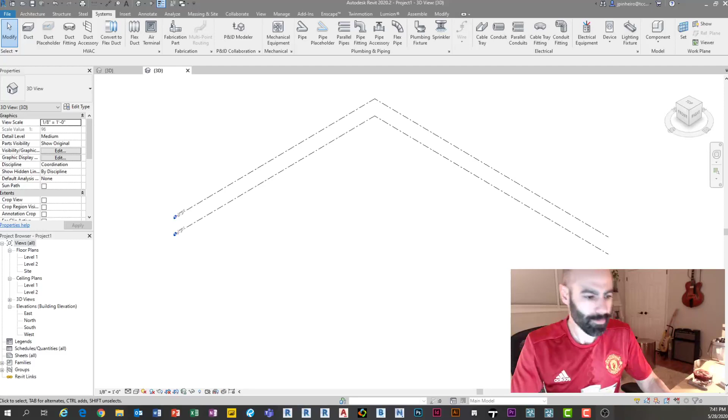What's up, Derek from Connecticut? Actually, you know what? Good point, Derek. So Derek from Connecticut is the one who made the thumbnail, so thanks, Derek. But I did want to show it live because I didn't want to use that specific thumbnail. I was afraid YouTube was going to rip it down, because you'll see why. So this was the original thumbnail for this Ductwork for Dummies. I thought that was pretty cool. But unfortunately, I was afraid that the stream would get popped down or something funky. So, all right, here we are.

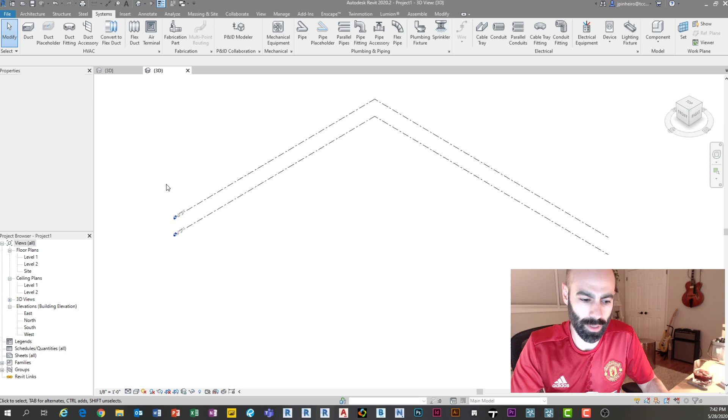So remember, I'm an architect. So I'm like, hey, I'm in Revit. I want to draw a duct. I'll even start it from scratch just so that you believe me. So if I start a brand new file, I go to File, New, Project, and I do an architectural template. So this is the Autodesk architectural template file, okay?

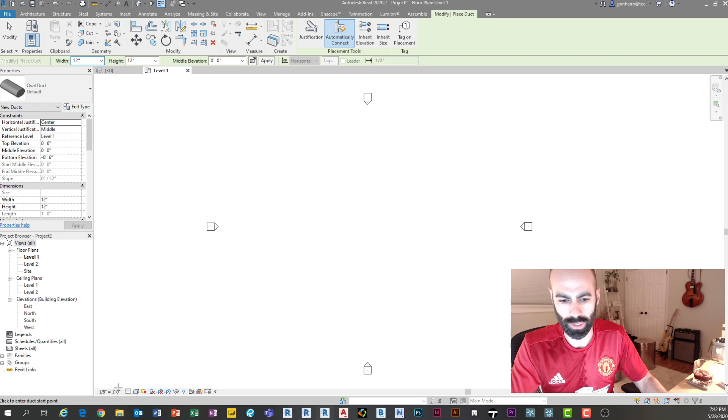If I go in here and I hit Systems and I say, hey everybody, I'm going to draw myself a duct. So I'm going to hit Duct, Oval Duct, right? I'm going to change the offset because right now it's actually drawing 9 feet above my head. I'm going to set it to 0 just for the sake of this. I'm going to change my view to fine so I can see it. So there we go, I'm drawing a duct, right? All right, now it's going to turn the corner.

Wait a minute. What? Why is it telling me no? Look, I can't click a duct except for straight. I don't understand. What on earth is going on here, right? And so this is literally what I did when I first hit it. And pipe, same thing. All right, I'm going to draw a pipe now. So let me click a pipe. Let me click 0. Click here. What the heck?

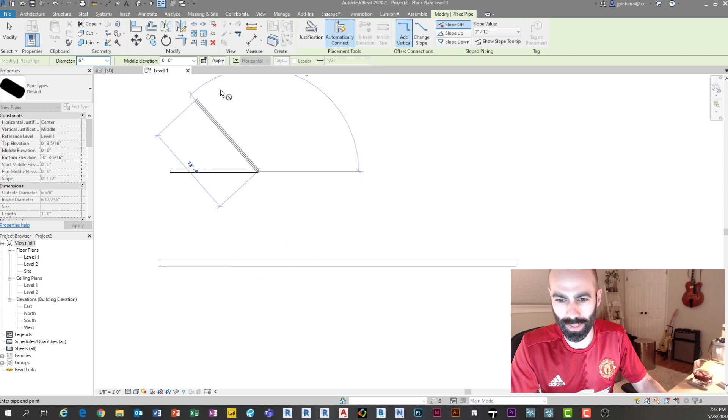Why on earth can't I draw a pipe in different directions? This doesn't make any sense. So then I'm like, all right, well, let me try. If I draw one over here and I trim it. Oh, what? Like it says there: the routing solution failed because there is no default fitting type specified, or the fitting cannot be found in the project. Ensure the fitting is loaded in the project and try again.

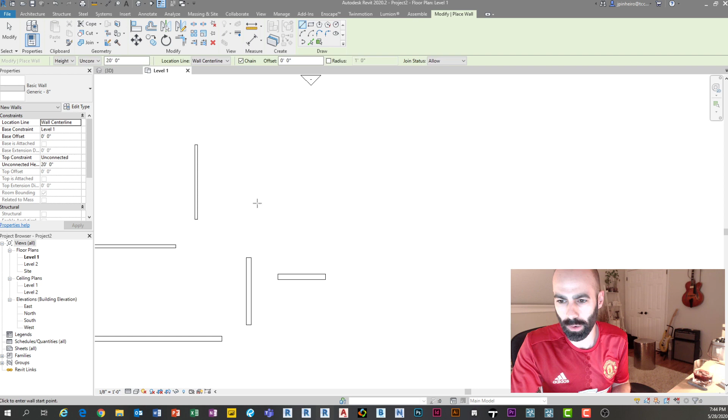Everyone has been here before, because that's exactly where you start, that's what happens, right? And so you're like, I don't understand. I can go into architecture, I can click wall, and I can do whatever I want with this thing. Look how beautifully that cleans up, right? Why don't pipes work this way? Why don't ducts work this way?

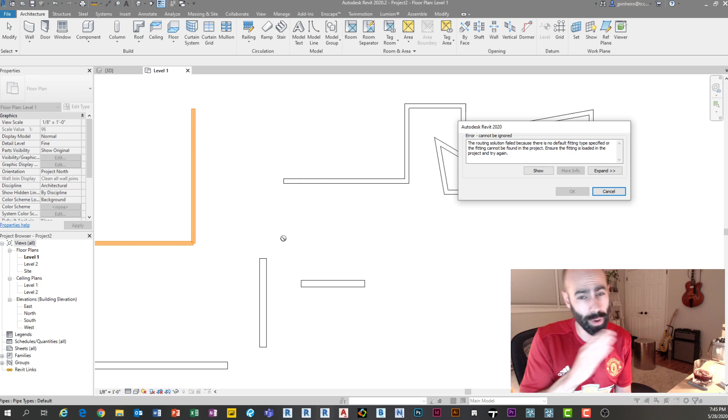And so the key to understanding, and this is really the most important concept when it comes to using pipes and ducts in Revit, is reading this error. When you read this error, it says the routing solution failed because there is no default fitting type specified or the fitting cannot be found in the project. So the difference between a wall and a duct or a pipe is that in order to connect two pieces of pipe, something needs to be there, right?

If I asked you to go install, I guess black iron pipe's not as common now, so maybe copper or PVC, but same idea. You have to go run a new supply line to a new sink in your house, right? Yeah, you could buy some bends and stuff like that, but odds are you're gonna buy a bunch of straight pieces of pipe, and then you're gonna buy tees and elbows and 45s and everything, right? Because that's just how these things work. Well, Revit's the same way.

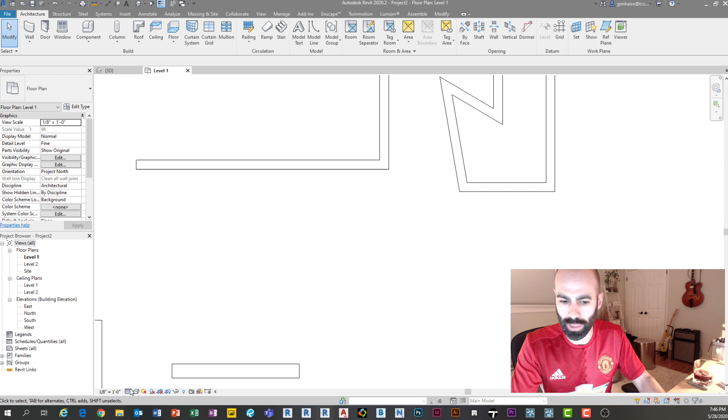You cannot draw these things without having your tees, your elbows, your Siamese, whatever fittings that will make these things connect, right? Walls don't need that, because walls, yes, there are layers to them, and really the biggest thing we're controlling with a wall is going to be how those layers return, how they loop and react with each other, which is their own thing. But you don't necessarily need a fitting to make a 90-degree wall, right? It's not necessary.

So all that being said, this is the architecture template, right? So then if I go into a file like this, and I go into my floor plan, and I go to 0, why is it that I can do that with my duct? I just made ductwork. It's all because of those routing preferences. It's all because of those fittings and those connections, okay? So where do you find these and how do you set them up?

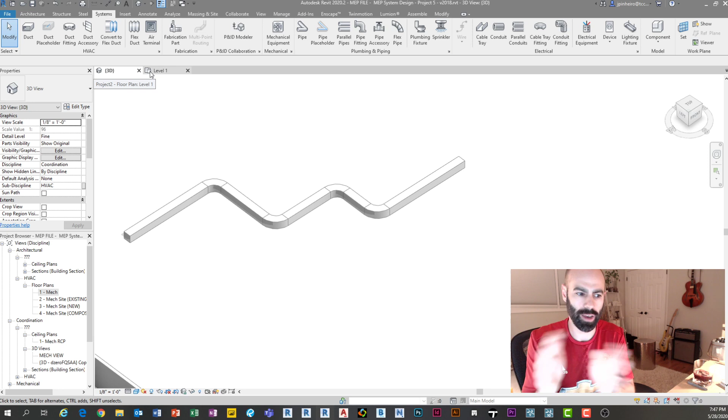So I'm going to go back to the architecture file. I'm going to be flipping back and forth. Eventually I'm going to land just in this file, but I'm going to flip back and forth a little bit because I really want to show you what it takes to develop and create this template file, and how to modify one if you need to. The cool thing about it is once you have a file set up with specific duct systems and pipe systems and the routing preferences that work for you, which for the most part you can get almost all of them set up and not have to do too much after the fact, then you're pretty much set.

You don't even really have to think about routing preferences anymore until you try to do something really, really wonky.

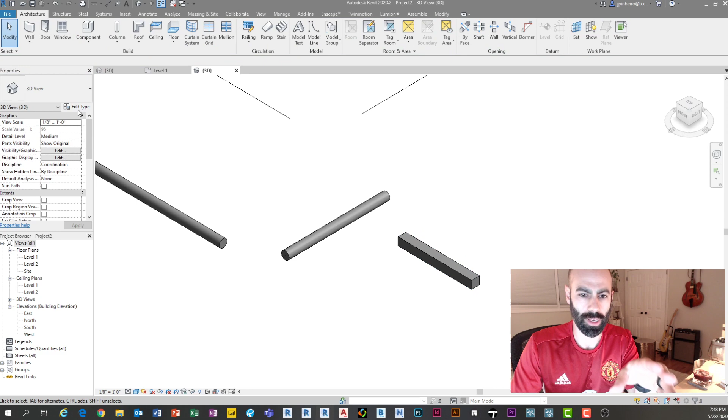For now, what I want to show you is if I go back into my architectural file and go into 3D, because why not? If I click this rectangular duct, by default there are ducts in here, right? There's an oval, rectangular, and a round duct. If I go to edit type on this duct, right down here, there's a little thing called routing preferences.

If I click this right here, you can think of this as important, if not more important, than your structure of your wall when you're digging deep into dialogues.

If I click in this, what you'll notice is that there's all these different types of connections. Look, there's an elbow, junction, cross junction, transition. But what you'll notice is that they all say no, or none, right? So basically, Revit has no idea when there's a cross or a transition or even an elbow. It doesn't know what to do, right?

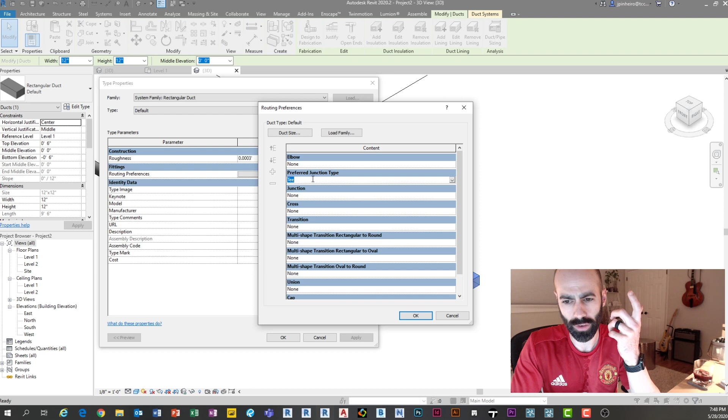The only thing, for some reason, that the architecture file has is a T, which I don't even think it had. I'm actually, since we're live, why not? I'm going to try to model a T in here and see what happens. Yeah, I don't know why it's telling me that there should be a T, but that's kind of weird.

Okay, so you'll notice these all say none, okay?

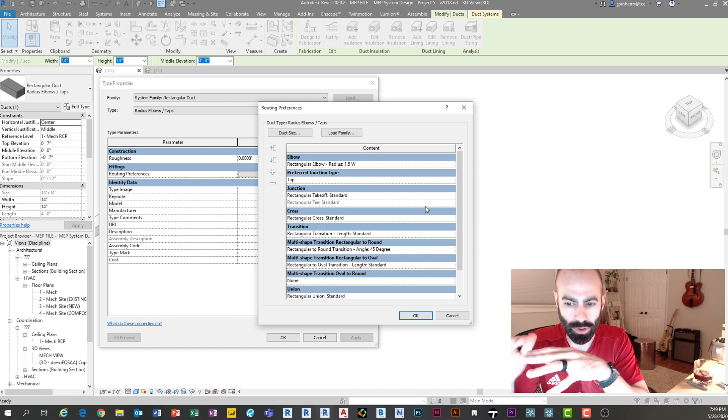If I go into my template file over here that has the routing preferences set up, and I click my rectangular duct, go to edit type, and go to routing preferences, look at that. There's a rectangular elbow, there's a tap, there's a rectangular takeoff for junctions, there's a cross, there are families applied to every type of connection or junction you can think of for this specific duct type. And so that's the important part.

So if you did not have a template, and maybe you're working in your architecture file, I'll show you a way to do that anyways. But let's just say for some reason you were starting from scratch, which after tonight you will not have to start from scratch. But right now, let's say you're starting from scratch because it's always good to know. And I'm in the architecture file.

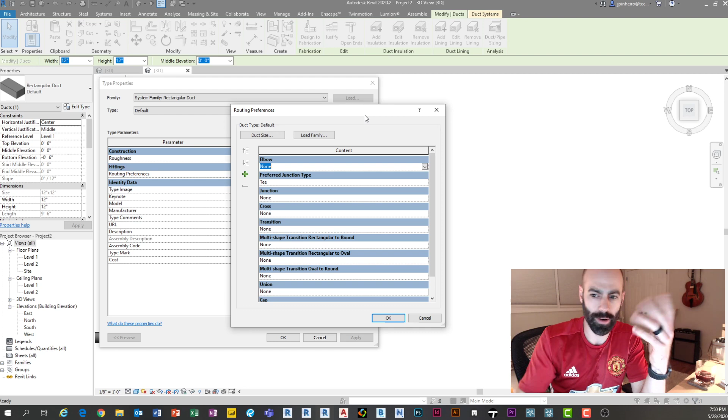If I click the rectangular duct here, go to edit type, and go to routing preferences, you'll notice that even in here, I can't even pick a family because every one of these junctions, the elbows, the T's, the 45s, the Siamese, whatever, right? Every one of those is a family, just like anything in Revit. So you need an elbow family. You need a T family, a radius, a mitered elbow, right? And so you actually need to go dig through your family catalog and load all of these fittings.

So imagine what the process is to initially set these things up, right? I'd have to go through every single one of these types, load the family, and apply it. Yeah, I could load the family, I could batch load the families and then apply it, but you're still doing it for every single type.

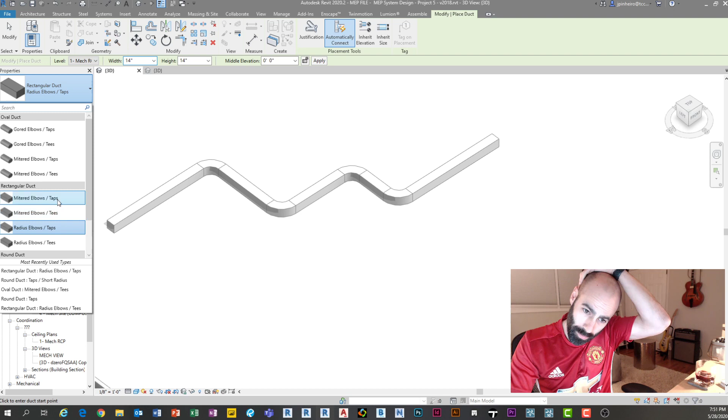And if you want to have radius, let's say, if I go on this one, for example, oops, I did multiple types, didn't I? If I wanted to have mitered elbows and radius elbows, which is what you're seeing here, right? See how there's two different types here? I have to do that for the two different types. So notice I go in here, and this elbow has its own setting, right? It's a mitered one, whereas this type has a radius. So not only do you have to do it for every single one, but you have to make sure the specific connection or junction is set for each family type.

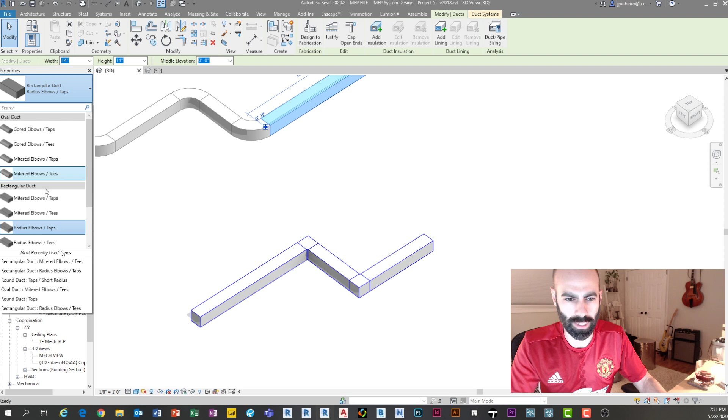So if you have multiple types of connections on rectangular ducts, you need multiple types of connections set up for rectangular ducts, right? See how these have 4, and these have 4, and then these have 4, right? These are kind of the most common that we use to create our MEP systems.

So if you were to do this from scratch, that's what you would have to do. You would have to march through and set up each one of those, which would hurt, as you can imagine. The good news is, you don't necessarily have to do that part of it.

You can start with a file that already has it, or you can use a file that someone else made. One way I've done it in the past is that if you've installed Revit, you have a mechanical sample file that Autodesk created, and that has a lot of them done. It's not perfect, it's not great.

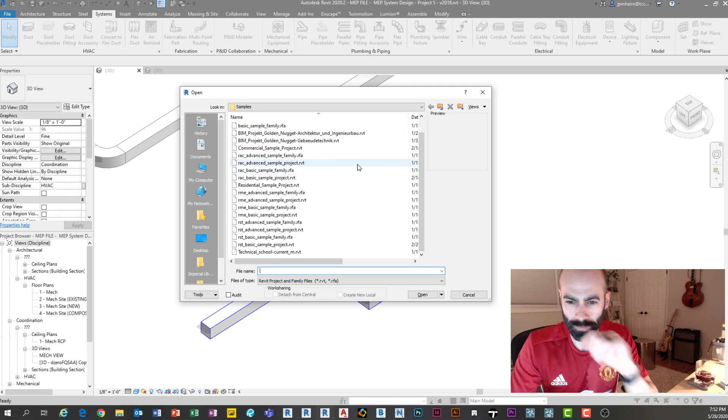But if I go over to File, Open Sample Files, and go to the RME Advanced Sample Projects, Revit Mechanical Engineering I guess, which you all have the ability to do, you'll notice that in this file, if I go to Edit Type or pull down here, you can see they have a lot of these things already set up, like routing preferences.

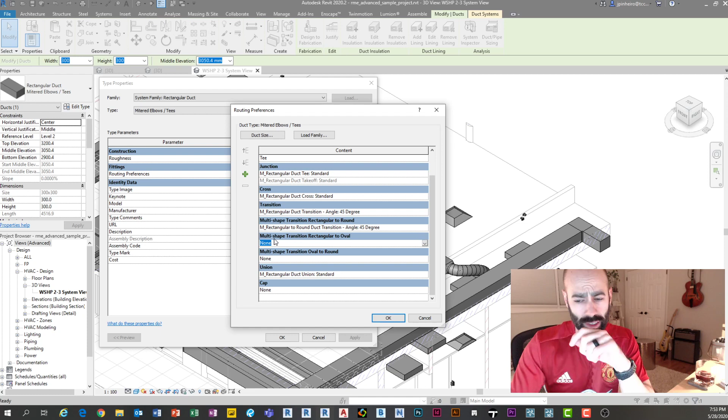But you'll notice there are some specific connections that they do not have families loaded in for. So you will find instances in this template where you may run into that same error, and you have to figure out what family belongs to the transition you're trying to make. So what you can do is start with this file.

You can start with a blank file and transfer project standards, which I'll show you real quickly how to do. What's funny is I'm going through all this, and it's 10 minutes down the road, and we haven't even really drawn a duct. I haven't shown you the process of drawing a duct.

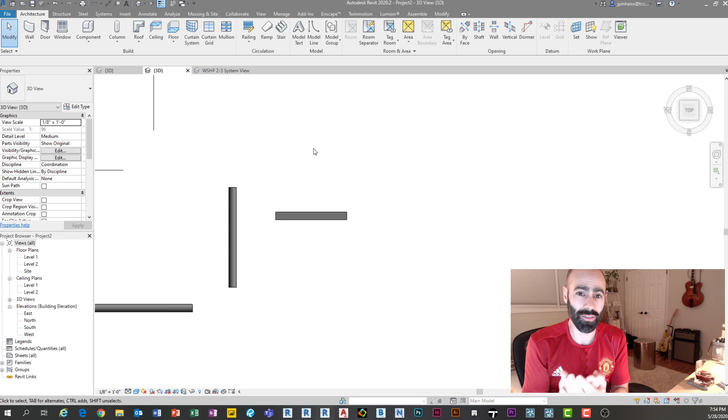Because this is one of the most important pieces of using the Systems tab. This is the most important piece of using ducts and pipes, is having the right junctions in the template, in the file that you're using. From there, once you set this stuff up, you'll see exactly how easy it really is to model pipes and ducts. It's super easy, but as long as these things are there.

So what I could do is go into Manage, Transfer Project Standards. Now I'm in my architecture file, and I can dig through and look for pipe types, system types, all these different things, and go down the list and so on. So if you want to, you can do that.

Or I do believe that if you copy and paste a full system in, it brings in, I think it brings in the type. I don't know, you guys can probably verify that for me, but I believe if you bring in an entire system that has what you're looking for, I believe it has it.

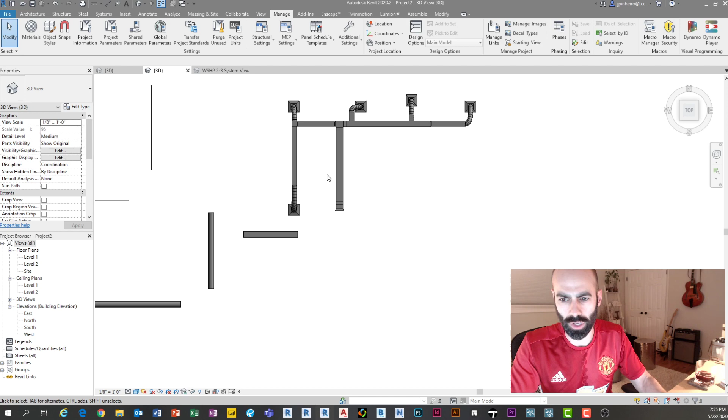Yeah, you can see there, notice this was a different type. See, mitered elbows, the default was what was there, and so it does bring them in. So that's one way to do it too.

If you guys want to use the file that I'm going to use right here, this file is one that actually Derek, who's in the chat right now, him and I sort of created by combining a whole bunch of things and projects that we've created. And then I use this specific file for homework for my students.

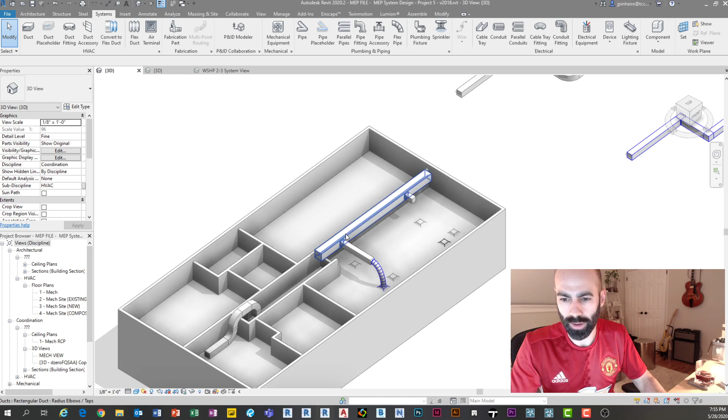So to wrap up that whole beginning section, I'm going to try to get to some of the chats I see there, so I want to make sure I read some questions before I move on.

Understanding that you need to have routing preferences set up - think about pipes and ducts, and think about how you'd build them in the real world. You cannot put two pieces of straight duct right together without a T, or two pieces of straight pipe together without a T. There's a connection that exists. That connection is a family, and Revit needs to know what it's doing. So there's not only a T, but imagine there's a 45 degree T as well.

You know, so you can see how this sort of grows and grows and grows.

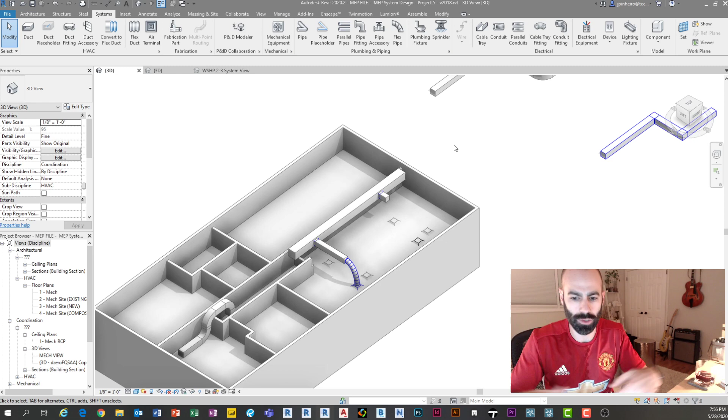So key here, setting up routing preferences is major. It is the most, if not the most, important piece of it.

Let me just read some of the chat, since I see folks are asking questions here. Sorry, Hussam, to ruin it with my Man United shirt, if you missed the intro. But I'm celebrating the Premier League coming back in a couple weeks with my favorite team, so I apologize if that offends anyone.

Everyone gets the error. Awesome. I knew you guys would. Oh, Derek's correcting me on how to make that T work. You're right, I can specify the junction type. Sorry.

My easiest method is, and Scoured actually just said, the transfer project standard process, which is great. So that's one way to do it. If you want to copy paste, you can copy paste, whatever, or start with the template.

Right, awesome. So Ryan asked any tips on ducts from laser scans.

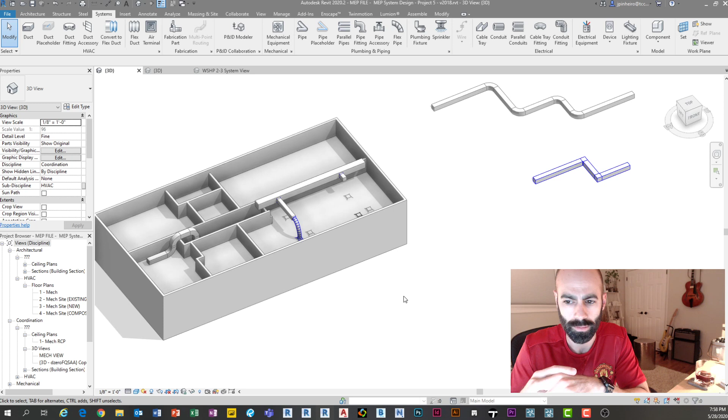Let's draw ducts first, and then we can get there. But I can tell you right now, I don't think there's any trade secrets yet for this, other than brute force modeling for that part of it. But either way, let us do this.

So now we have a file, and our file has what we need, right? It has ducts, it has pipes, and ideally we can draw pretty much whatever we want.

Once you have that, modeling the ducts themselves actually becomes extremely simple. It's very much like drawing walls, right?

So what I'm going to do, this is what I teach in my class. This is actually the homework assignment I give to my students. But really it's just some reflected ceiling plan with some ducts on it, just to get them to reinforce what they learn.

But the actual ability to draw, I'm doing it in a reflected ceiling plan because I feel like that's the easiest for me to model in. It makes sense to me.

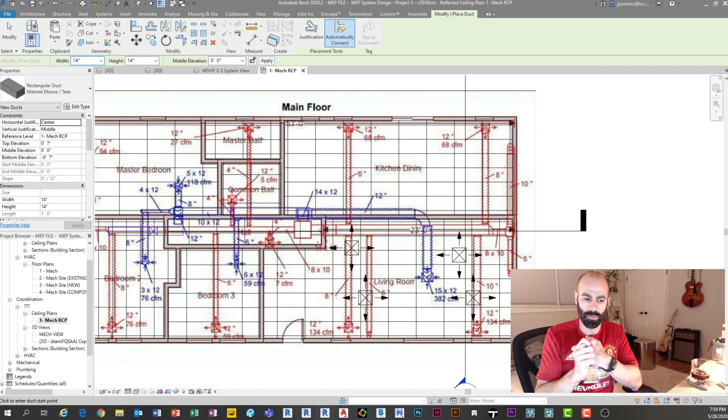The first piece of modeling ducts and pipes is the routing preferences and making sure those are set up, right? Starting with a good template or bringing in good template information. But really it's bringing in those duct and pipe types that have the routing stuff ready to roll, okay?

The second really important piece is not being afraid to use views. So when you're modeling pipes and ducts, you are going to be flipping between floor plans, sections, elevations, reflected ceiling plans, and 3D views. You're going to be using the whole gamut because it's the easiest way to do it, right?

And I just saw a question here that said tips for vertical pipes and ducts. We're going to get right into that in a second, but the views are really important because just like anything else in Revit, the ducts and pipes rely on work planes. Everything in Revit pretty much relies on work planes, right? And so it becomes important what view you use to actually draw your ducts and pipes, okay?

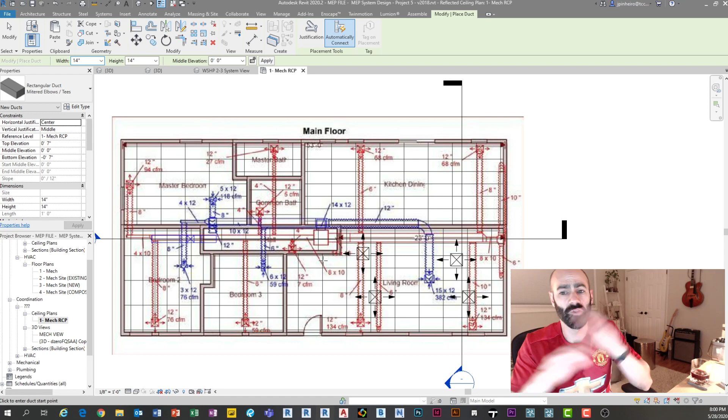So right now, really simple. I'm on a reflected ceiling plan, and I'm just going to draw some ducts. So you can see my reference level is level 1.

But you'll notice it's level 1 mechanical RCP. So that's this level. It's a little confusing because of what it's named. I didn't want you to think there's a level up here. But so this is actually my reference level. But you'll notice, and don't be afraid of this because it screws everyone up.

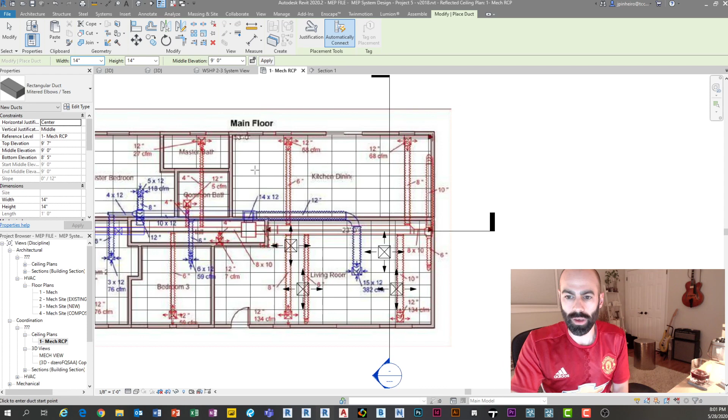When you hit ducts, it's kind of like when you're drawing foundation walls. Every time someone new draws a foundation wall, they're like, why the hell can't I see it? Because Revit defaults the base of the wall to be like -10, right? And so by default, the elevation of your ductwork is usually set to like 9 or 10 feet. So if I'm in a floor plan and I go to draw a duct, immediately I'm going to get this error.

Oops, there it is. Let me pull it up there. Right, none of the created elements are visible in view. So I can't even tell you how many times I get this question. Where is my stuff? Right? If you go in 3D, you'll see it's there. But what's happening here is that you're in a floor plan view, cutting at 3 feet, and you're drawing your duct at 9 feet above your head. Right? And so that's where it's important to have your view set up and to understand what's going on here.

So by going in my mechanical RCP, you'll notice there it is, because now remember I'm cutting at 3 or 7 feet and I'm looking up, whatever my RCP is set to. So by default, pay attention to this options bar. The options bar in the middle here, which no one ever, especially when you're new at Revit, remembers is here. Somehow it's green right now, but I can't tell you how many people miss this bar right here. Don't miss this bar. Whenever you're stuck on Revit, start here. Look at this bar, okay?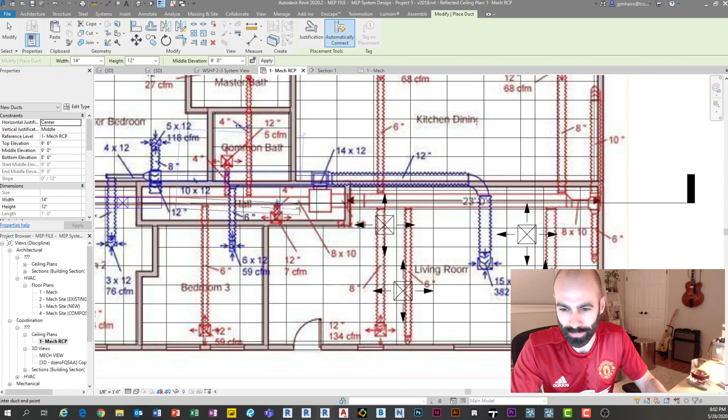So let's say I want to draw these at 9 feet. So it's pretty simple, right? There's a size, and you can see all the sizes are here. And this is the height and the width. I'm not even going to bother trying to zoom in and read that right now. But let's just say that I'm going to do a 14 by 12 inch duct here. Oh, it's 10 by 12. Of course it is. Okay, so I'm going to draw it to here. And now I can just keep drawing as if it's a wall, right? I can draw left, right, up, down, whatever.

I know it's hard to see. Sorry. I should probably just... Ooh, man, sorry, my throat. Is anyone else's allergies getting to them these days?

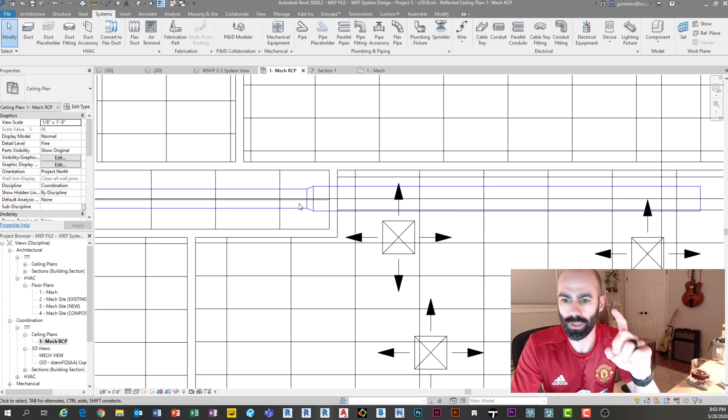Okay, let me just hide this plane because it's just annoying now. So now I can draw ducts just like walls, right? I'm drawing at 9 feet and so on. But what I can do also is, let's say the width now changes to 18 inches and the height changes to 14 inches. If I continue drawing, you'll notice it automatically enlarges and there's a fitting there. And that's part of the routing preferences, right? If I go back into my architecture file and do this, it's going to yell at me because this fitting, which is a 45-degree transition, that family doesn't exist. But because the routing preferences are set up, I can just go willy-nilly.

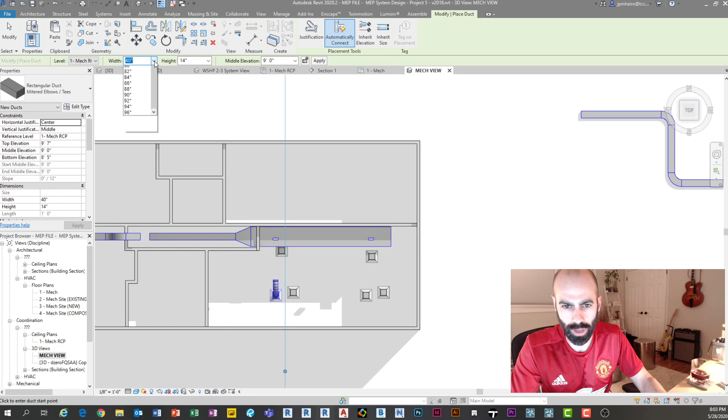I just change this to a 40-inch duct. I'm going to do some stuff in 3D now because I think it'll be easier for you guys to see. Let me go to the mechanical view. Here we go. Right, so you can see this fitting here, and it just adjusts. It's a parametric family. But what you notice is that as I was drawing my ducts, I don't really have to think about it anymore. Let's see, 9 feet, 40 inch. Let's draw now a 19-inch duct from here to here, and then maybe we'll turn the corner, right? Notice how that just drew. I just click, click, click. It's just like a chain of stuff.

Pretty freaking awesome, right? Oh look, I still have taps and all kinds of random stuff from before. Sorry about that. Delete all these. So the reason that you could not do that before is because of those routing preferences, right? Once you have these things set up, it makes your life so much easier.

If I want to draw pipes, same exact rules. So I go into pipes. I can set my diameter. I want to do 8-inch pipes. You can see my pipe is set to 10 feet off the floor. Notice I'm just working in 3D now. 3D is usually one of the easier areas to work in because you can flip between floor plan and elevation. But again, you're going to be all over the place with views when you're doing MEP for sure. So now I can just draw this pipe.

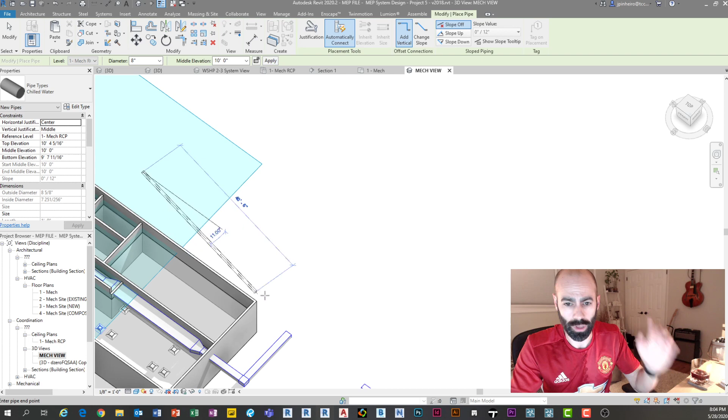Look at that. Notice it's even doing 45s. And then here's a funny thing. Notice how I can do this 90, but the second I go more than 90, I get a no. That's because there's not a fitting in there. The fitting type can't do that goofy justification there. So there's some things you have to do.

But for the most part, not to mention would you want to do a joint like that? I don't know. This is probably going to get you far enough. Okay, so notice how I can just draw pipes as if they're basically walls. Right? It's that easy. And then if you want to change the height of them, you want to change the size of them, it's very easy.

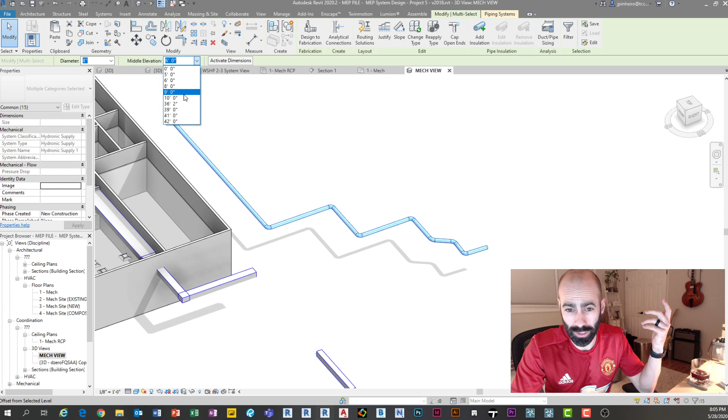If I just tab selected them, I can change the height to 8 feet, 9 feet. I can move them if I wanted to, but I like using this because now you're controlling it based off a level, which means that the level moves, your pipes move, parametric, Revit, you get it. If I select this middle one and I try and change it, this may blow some things up. Not too bad, look at that.

So I change this to a 10-inch, and because the transitions are set up, it automatically put in this adapter, right? This transition piece. I can change the entire system if I want to a different size. See how it just changed. So again, all of this is super simple because of the template I'm starting with. All right, and then notice the views make a difference. When do views make a difference?

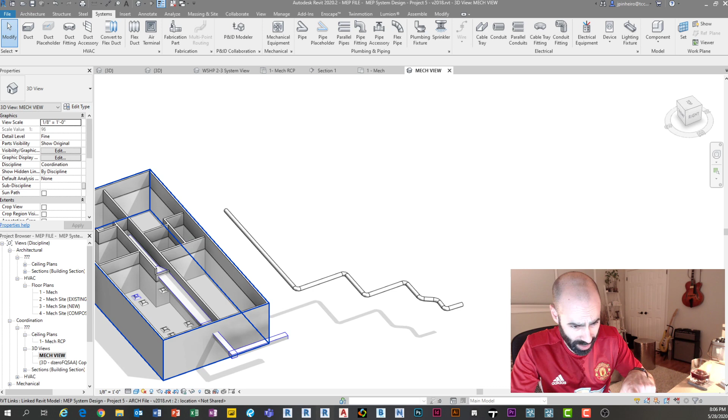Well, somebody asked about making vertical pipes and stuff like that. My favorite way to do vertical pipes, and there's multiple ways, but my absolute favorite way is to just do them in a section. So let's say I've got this duct here. The only problem with doing it in a section, and we'll talk about it in a second, is where the work plane is. But let's say I wanted to have, oops, wrong project.

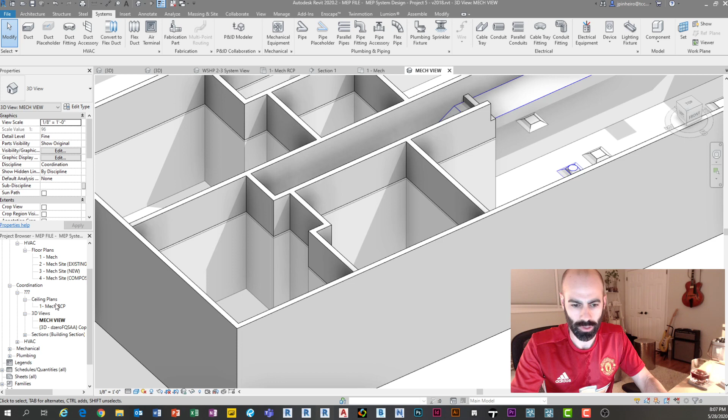Let's say I wanted to have pipes that went over this little wall here for some reason. Let me make this wall go, oh, this is a link now. I forgot. I did some weird stuff. So let's say I want the pipe to go over this wall, or there's something that I need to get out of the way in this wall, right? So one of the easiest and quickest ways to do vertical pipes is to just create a section and imagine that the center of my pipe is going to be this section. That's my work plane, okay?

So now if I go into this section, I go to pipes, you'll notice that it's still using mechanical room as my work plane. But I can't change the elevation. Why? Because I'm drawing in this goofy direction. So what I can do now is, look at this. I can draw now in a section as if I was drawing in a floor plan. See that? And now you'll notice if I select each one of these, the middle elevation is automatically set where I drew it. Pretty sweet, right?

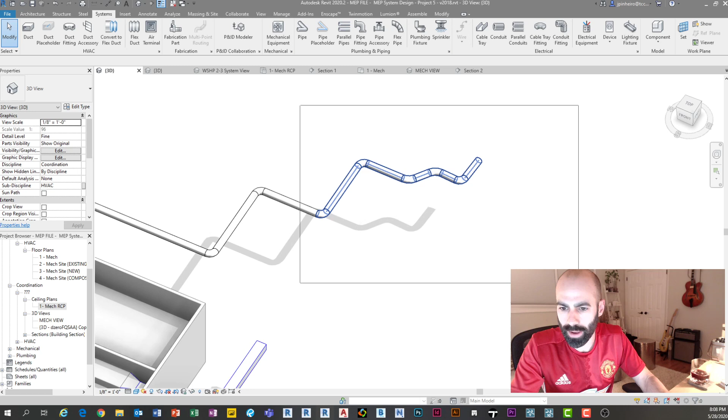So right off the bat, the easiest possible way to draw things vertically is to just cut a section and draw them in a section. There are other ways though. I don't know if I should do them in this or in another one. Let's see. So if I took this piece and I changed this to 15 feet. Oops, let's not do it that way. Let's disconnect it. So what I'm going to do is take half of this pipe here, get rid of this transition. I'm going to move this guy up, move this guy down to 10 feet.

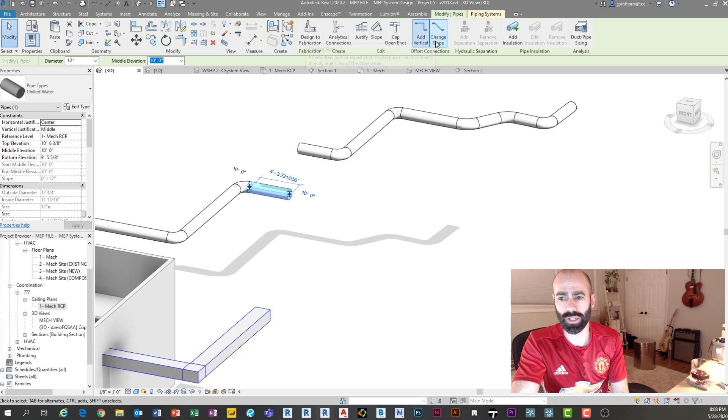Or 1,000 feet. What the hell did I just type there? 10 feet. Here we go. I don't know what just happened there. Okay. So see, there's connections here where you can say add vertical, add whatever. And so by doing that, depending on what your settings are. Sorry about that. I just got click happy there.

When you connect them, so see how I have these two runs here? If I was to take this piece, and this could have been done in elevation view as well, but I like doing it in 3D because it's really easy. See how it says add vertical? It's set to be adding vertical. So it's automatically going to try, and notice how it's locking to the middle. Revit's saying, all right, well, I'm going to do a vertical piece in between.

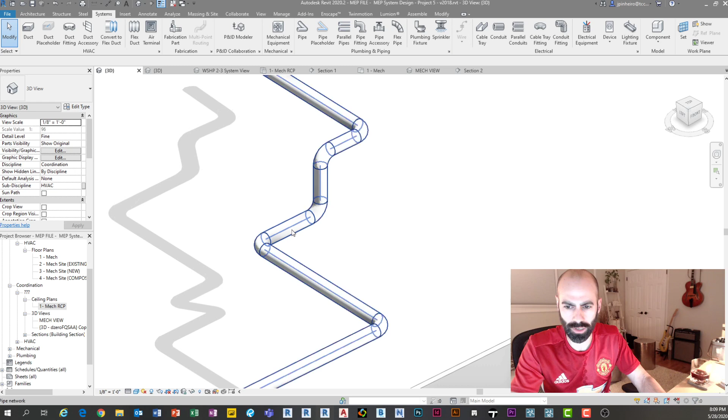Okay. So if you don't want to draw a section, because this would obviously have been hard to draw a section on, right? The easiest way to do it there is you jump into 3D and you just drag select and call it a day. So like, for example, this may not work perfectly, but let's give it a shot. Why not? If I tried going from here, no, that's not gonna work. There we go. Okay. I thought I was gonna try and do some angle.

So like, notice how these two ducts are at two different levels. If I go from the middle of this one, I'm locking, I'm connecting. All these things are set to automatically connect. And then it locks down to the bottom. If I click there, look what it does. It actually tries to make those connections. So when all of these things are set up, it becomes extremely easy to do.

And this is why it blows my mind. And again, I was in the same boat to think that this whole side of Revit, this whole systems thing is so hard and complicated. The reality is, once you have these things set up, once you have the template set up, once you have the routing conditions set up, it becomes extremely easy to do. Okay. So that's how you would model some stuff.

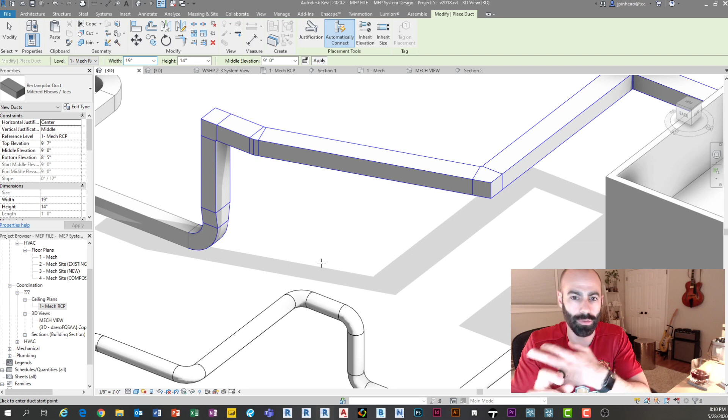You notice what I did there is I modeled in a RCP, I modeled in a section, and I modeled in a 3D view. So that's what I mean by views become really important, right? You're gonna need multiple views. You're gonna need working views probably if you're making documents out of these things. The views themselves are gonna be extremely important.

You'll also notice here, check out these joints. I mean, we've got 45s, miters, reductions, like all of those things there would have been errors in the other template. Every single one of those. All right, sweet.

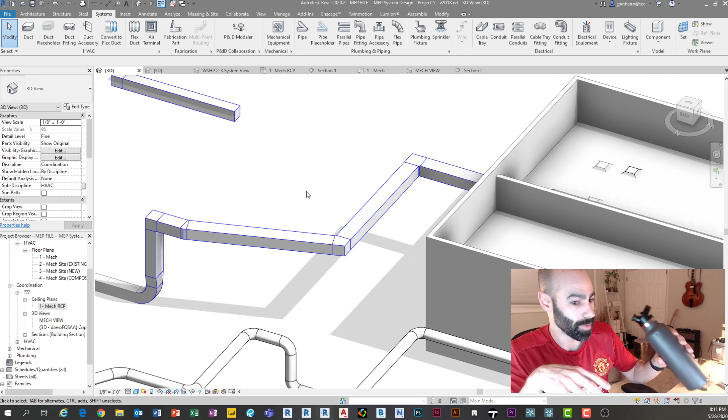Oh my goodness, it's 8:10 already? Get out of here. Okay, so let me just catch up with chat. Tango was upset that my ceiling grids weren't lined up. I'm sorry. That's just because of the image and the grids there. I apologize for offending you. I know I have the same kind of OCDs sometimes.

A couple people are talking about wall openings. We're not going to get into that today, but yes, it would be nice if there's automatic wall openings. There are. I believe there's a couple plugins that do it, and there are some Dynamo scripts that can get it done. So definitely look into those if that's something that is a major pain point.

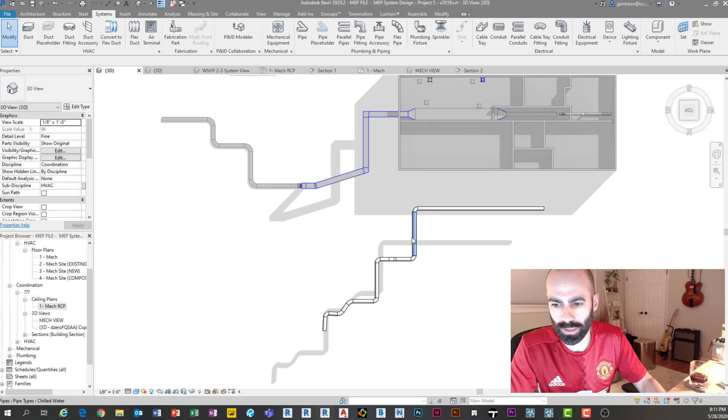Eduardo was one who asked about vertical pipes. I hope that answered your questions. I know that's one of the biggest concerns for people is you're drawing all these pipes, and you're like, how the hell do I make these things join vertically? And that's exactly how you do it there.

Let's see here. What else? Wondering if there's an easy way to do sleeves. Same question, so sleeves and openings are a challenge, right? And so, like I said, the way I've done it in the past is there are Dynamo scripts out there that do it. Yeah, I would say look at Dynamo scripts for now. One more question before I move on.

Talking about as-built. Yeah, Ryan's still talking about the laser scanning. And so, yeah, the biggest piece, for those of you who ever dealt with creating as-builts from laser scans, is that you can't just press a button and it converts a laser scan to pipes. Yeah, I know ReCap has this funky little tool that sort of does it, but the reality is you're gonna be modeling. There's grunt work involved in creating as-builts still.

Okay. Tips on pipes with slopes. Cool. Let's talk about it.

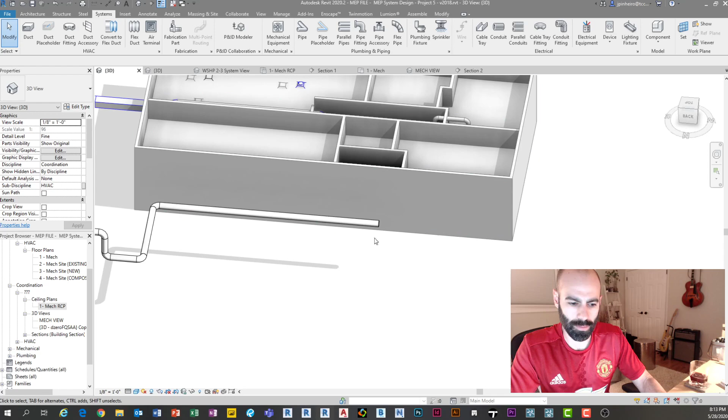So you'll notice each of these pipes has an elevation at each end. Right now I'm justifying it through the center, okay? And so if I know the elevation, so let's say this is 9 feet, ta-da, it's sloped. So I just changed the end elevation. But you'll also notice that there is a slope right here. See, it's saying 81 and something or other. So

if I wanted control over the slope itself, there's a little button. Sorry, I didn't mean to click. I was clicking too fast on you guys.

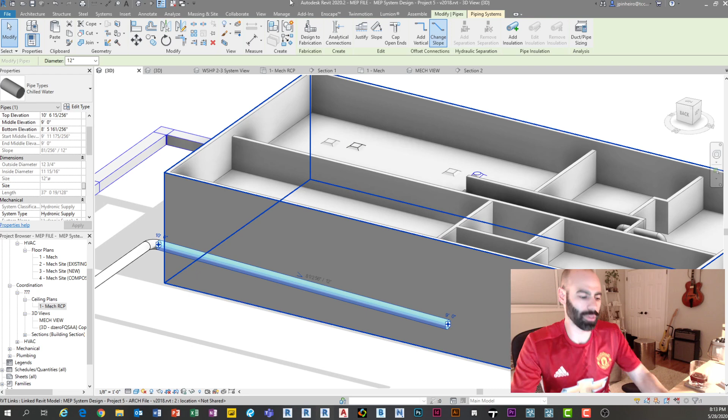So notice it's grayed out, and so that's what some people get a little confused about. So I just did 9 feet to 10 feet because I know that's what I want it to be. But maybe the rule is you want this whole pipe or this whole system. So let me undo that so it's flat. Maybe you want this entire system to be a 1/4 inch per foot.

So if you click slope, it opens a slope editor. And you can see I can do a 1/4 inch per foot, and I can say where do I want to start. So I'm starting over here. I click finish. And now your whole system is sloping at a 1/4 inch per foot. How do you know? I'll go in this view and you can see. See that? If you want to do individual pipes, you can select them. But that's probably the easiest way to do it.

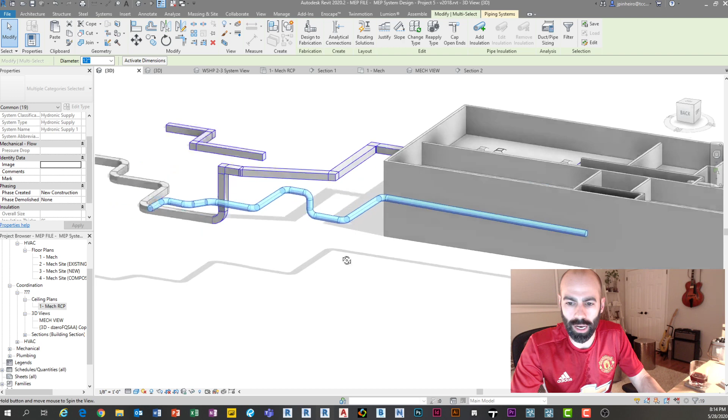I'm sure there's other ways, and again, I'm not an engineer, so for those engineers out there who have workflows and setups that maybe make your life easier, as the architect in the room, I'm going to say that's how you do it. You click it and you change it.

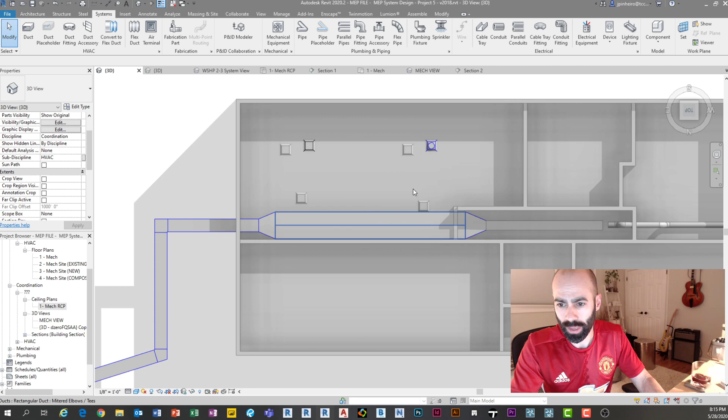So I'm just drawing right now. I'm in a 3D view. Notice how in the 3D view you can flip down to plan views and stuff, and it helps. So let's just say this goes from a 40-inch to a lovely 12 by 12. Nice big drop there.

Sorry if you guys heard that noise there. My VPN automatically disconnected. I guess I stopped working for a little while.

Okay, so I'm just drawing a connection here. So notice what this did here is it put a 12 by 12 inch duct connected by a T junction to this guy. I'm gonna make these taller. So I'm gonna select this system. Oh boy, I forgot it's this whole system, huh? Let's not mess with that right now. I know some of you mechanical guys are probably like, you just deleted this system.

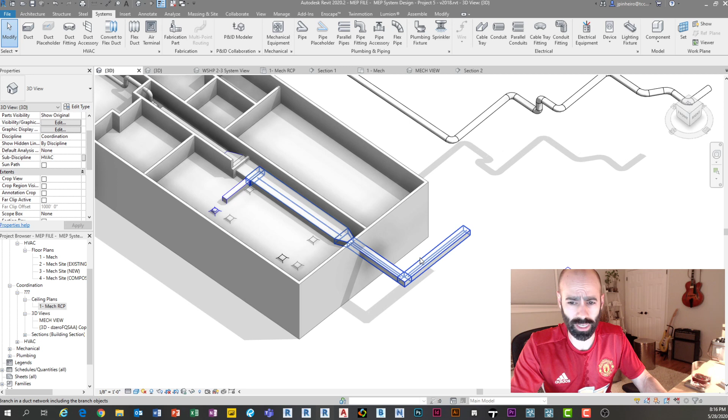All right, and you'll notice I'm tabbing a lot. So one of the things you'll get used to is that when you tab through, and we'll talk about those materials, there's like 17 million times you can tab and select different things with ducts and pipes. It drives me freaking nuts, but you have to sort of pay attention. So this is doing an initial branch, and this is doing another branch of objects, and then this is doing the entire network of objects, and then the next one is doing the system.

So right now I'm just going to select the entire network, and I'm going to change the elevation of this to 12 feet. Oops, 14 feet, let's do. Okay, so what I want is it to be a little higher.

So before I move on to materials, I just want to talk a little bit about diffusers and connecting to them. So when it comes to connecting to diffusers, for the most part, the family itself doesn't matter other than where it's hosted to. So you have face-based, work plane-based, etc., right? And that has nothing really to do with the connection.

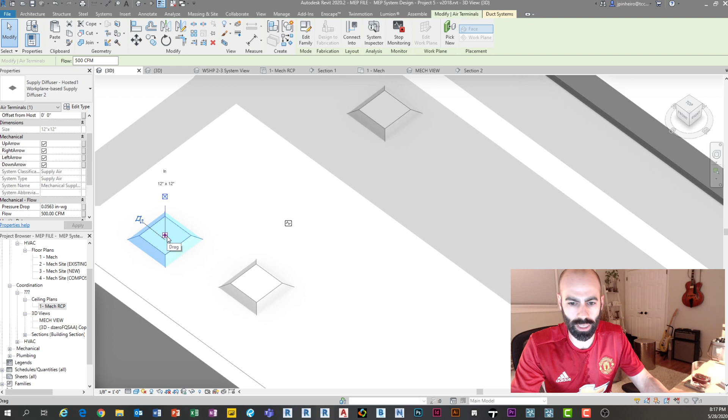But the key is making sure that there's an MEP connector, right? So you need a duct or a pipe connector on whatever fitting you're connecting to. And that exists in the family editor. We're not going to jump into the family editor today. Oh, sorry about that. But the reality is it could be a star-shaped whatever. As long as it has this connector, then we're good. And notice the connector has a 12 by 12 inch written. So when it comes to ducts, most connectors, you need to have a size.

So some cool things you can do is if I just take the connector piece, I can, oops. Oh, this is a coordination element. Sorry about that. I was showing people how to do copy monitoring, so that's not gonna work.

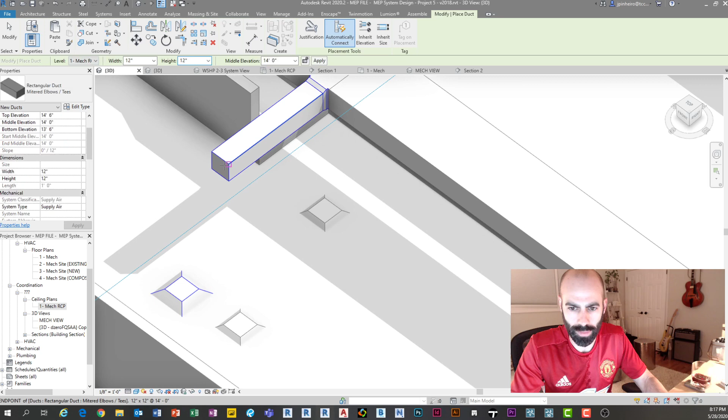I'm gonna place a new one that's not copy monitored. Sorry about that, guys. So I'm just gonna quickly place a diffuser that's not copy monitored, so I don't deal with all the trash that you're seeing. So supply diffuser, hosted. Okay, so this one here.

I'm trying to remember which one is face-based. Sorry, guys. Work plane is... Okay, so this one is face-based. So I'm just going to place a supply diffuser right here. Ta-da. I'm going to delete this guy. Man, copy monitor is not happy with me today. Okay.

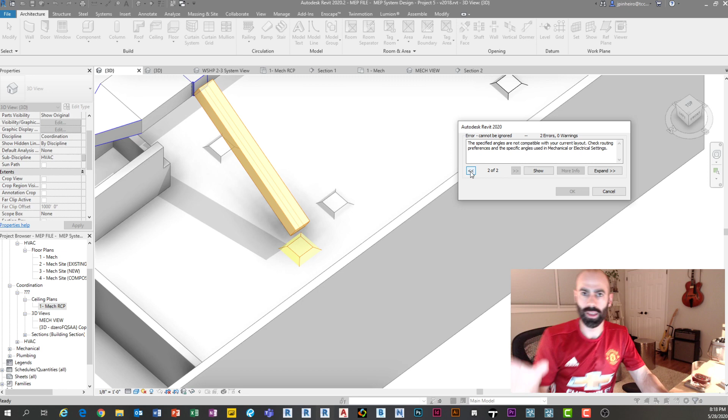So now, if I want, I can connect these pieces. Look at that. The resulting angle between the segments is too great or too small. So this is where understanding what your duct can and can't do matters. What this is telling me is that the mitered angles are not going to make it work. It's just simply not going to work.

Okay, so there's a couple things you can do. Obviously we could just draw in our section view the vertical piece if we wanted. There's multiple ways we can solve this, but what I really want to show you guys right now, just for the sake of knowing how it works, is a really cool thing called flex duct. I think everyone knows what flex duct is, but what's cool about it is that it's spline based.

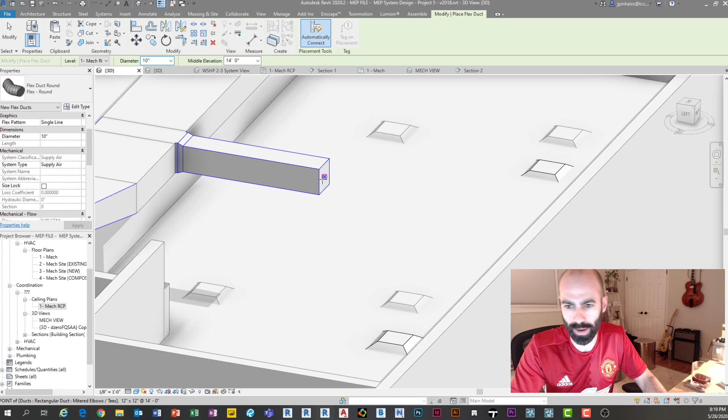So if I'm just drawing some flex duct, look what it does. It does all this crazy stuff. See that? Super freaking cool. Okay, so flex duct also has connectors and stuff like that. And I don't know what I just did. Whoa. Look, I just blew up the flex duct. Hold on. There we go.

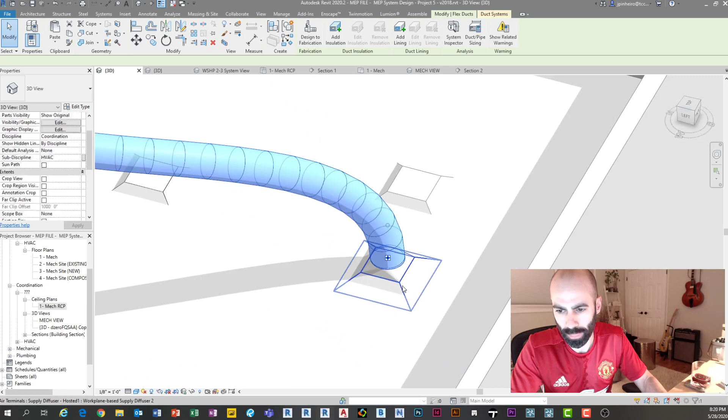So what I was getting at is flex duct is gonna override any of the trash that you run into. Notice I just clicked from here to here and it automatically made the connection. So pretty simple to use. You can change the diameter of it, 14 inch, 12 inch, etc. I'm really messing with it here. Oh yeah, look at that thing. Well, either way, you get the idea.

So I advise you to use flex duct only when extremely necessary, unless you are physically modeling and want to create flex duct. I know for a lot of people it becomes a workaround, and I wanted to show you it just because it exists and it's good to use. Flex pipe too. It does come in handy when you're really stuck in a jam, but try to only use it in positions where you would actually want it to be. Okay, so anyways, connecting to diffusers.

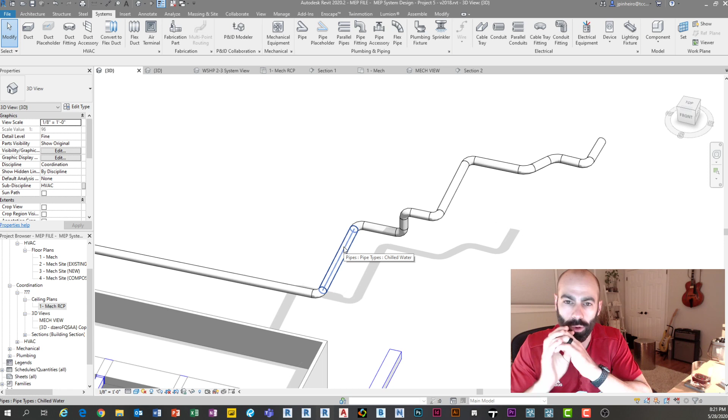So last thing I want to talk about, because it was a good question, is how do you control the way things look? When it comes to MEP systems, the rendered material and the shaded material are all driven by the system. So if I go into visibility graphics and go down to ducts, I want to make my ducts pink, but why is this grayed out? So you can't use it through visibility graphics. So then I'm like, all right, I want to override graphics by view.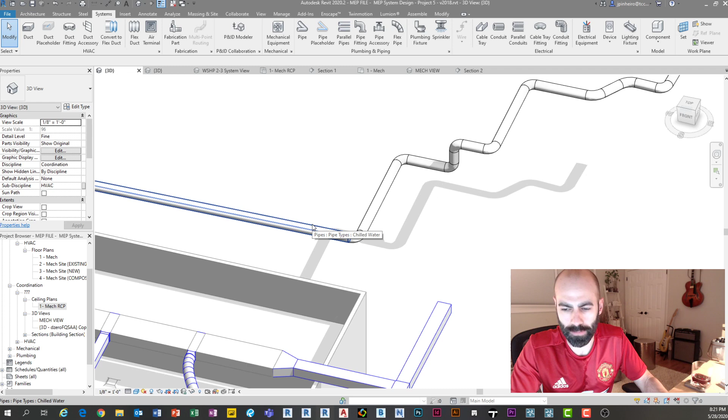How am I supposed to make this pipe pink? Well, remember how I talked about tab? If I tab, I get the network. If I tab twice and I get those dotted lines, that's the system. If I click that, you'll notice there's a system name. It's called hydronic supply 1. So if I go to edit type, notice that my systems have a material. So if you want to color your ducts, and even in rendering, then they need to be systems, and systems need to connect.

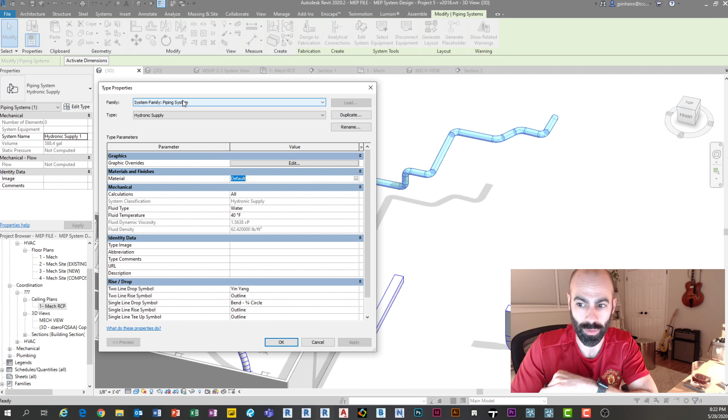So you might select them differently, but for now these are default. I'm just going to apply or create a material - it doesn't really matter what I call it. I'll call this one 'pink pipes' - obviously you might want to call it hydronic supply or something like that. I'm going to change it to a lovely, obnoxious pink, and then change the rendering appearance to match. Click apply, okay, and ta-da, now our system is colored.

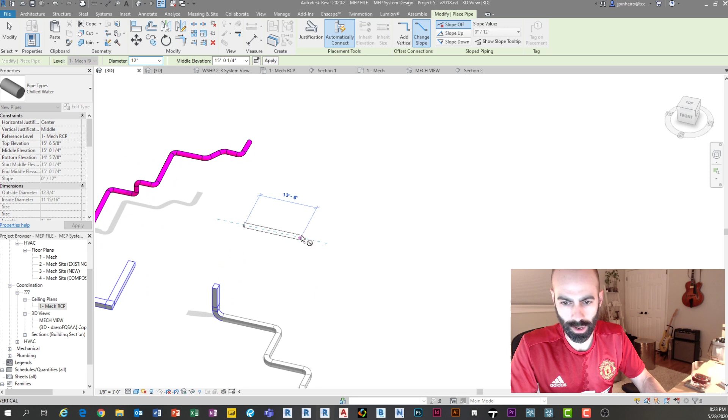But notice if I draw another piping system, it's pink too. I can tab around and change it from hydronic supply 3 to 2 or to 1 or whatever... well, actually I can't because I already made the other system, sorry.

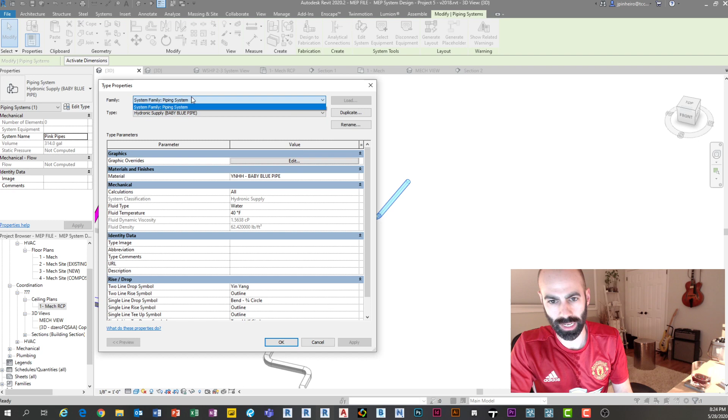So notice in here there's types, so there's types with colors. I explained that wrong, I'm sorry guys - the system name you can call whatever you want, but the system type is actually what you're seeing here, which is piping system, hydronic supply, blue, etc. The system name and the system type are two separate things.

What I was going to say is that you could also create a filter using system names. So if I go to filters and do piping systems - go down to pipes, piping systems, system name - you can say equals, say 'pink pipes', and do an override. So technically there are two ways to color pipes: you can use the system name or the actual system type. But either way, you cannot change the color of pipes or ducts individually - you have to change the system.

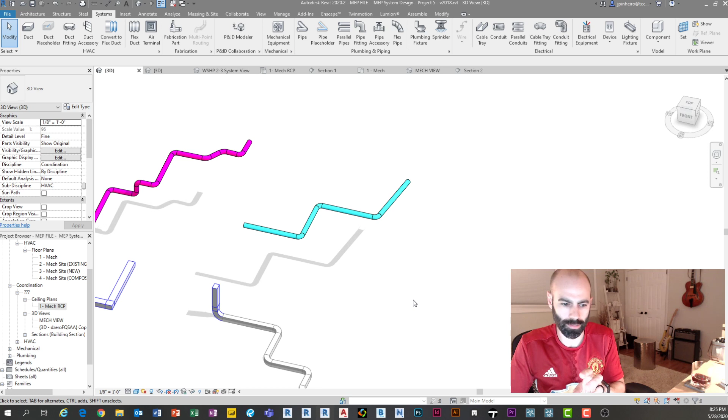So I hope that was helpful. I know I screwed up with the system names and types, but listen, it's live, what are we going to do? And I'm an architect, so I think that was still helpful.

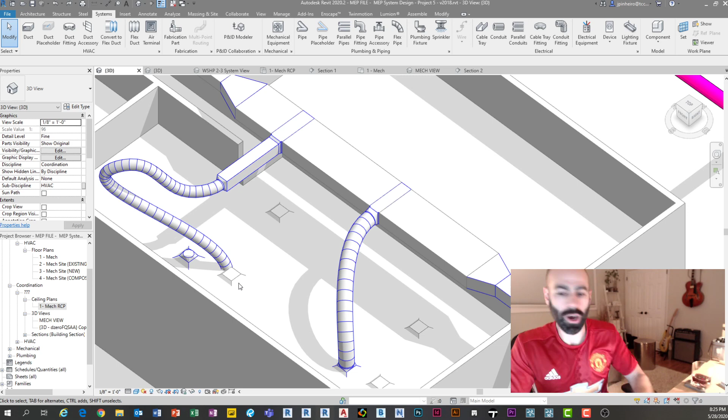How could we connect MEP elements with architectural elements in copy monitor? Yeah, so that's what I was showing here - you cannot connect directly. What you'll notice is that this architectural model is a link, so if I tab in, this is actually a linked diffuser, and you cannot connect to the connector of a linked model. However, you can copy monitor it, and then connect to your copy monitor. The downfall is that when things change, the engineer has to go in and manually accept the change.

It works fine - it's a solution that works perfectly fine as long as users are doing what they're supposed to. Gary just mentioned that filtering is good for color coding linked consultants' models. Good point - being able to access the system name is really quick and easy through links too.

But those are two ways that you control it. The key is understanding that when I tab, even for ducts, I have to tab to that system, which is the dotted line, and then from there I can apply different system types and colors. Of course, for some reason half of mine is drawn in existing because I don't know what I was doing - there we go. So it makes it really easy, and because they're by material, those are the materials used for rendering settings too.

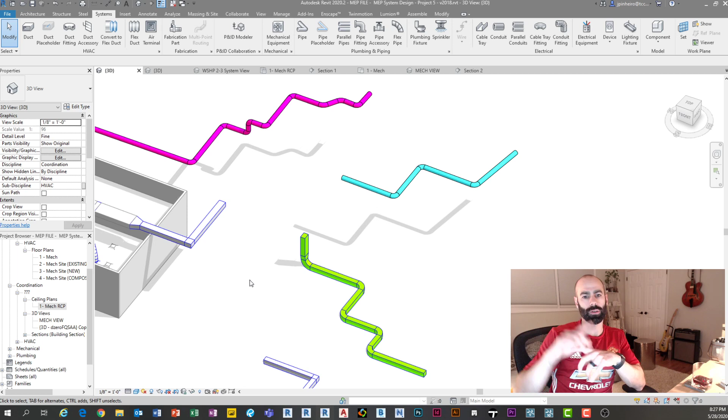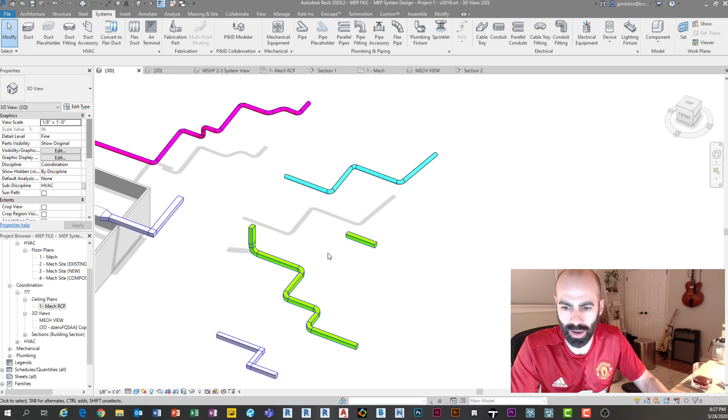Aussie BIM Guru's asking me, does the default duct object style material work as a blanket approach for orphan ducts? So I think what you're asking is whether it's a good idea to have that default material set to something specific - if I tab in, of course I clicked the wrong one - so the default right here being something specific, I guess so, yeah, I don't see why not. I wouldn't, for the sake of using the model for other things, it would be nice to have a default, like default duct, instead of just using the default global.

All right, I think that's most of what I wanted to do.

Yeah, I think that was it. The only other thing that I didn't show, which is pretty cool for everyone, especially when it comes to the visualization side of things, and this is for the architects.

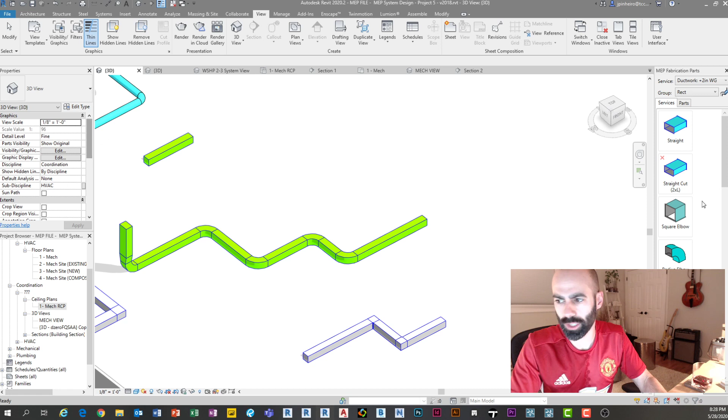In Revit 2018, 17, whenever, they introduced fabrication parts, if I go into view. Some of you may have noticed this, but this is basically the AutoCAD MEP library. So this is individual parts brought in that have really, really cool details.

So when it comes to visualization, for example, if this was my exposed duct, I may want it to look a little more realistic in my renderings. So what I can do is select my entire duct run, and I can click Design to Fabrication.

And again, this is also one of those things where you want to use that template I'm sending out, because some of these things you have to set up ahead of time. But if I just do Ductwork 24 by whatever, you'll notice it converts these into basically parts.

You can think of these almost like parts for a wall. But what's really cool is now they're individual pieces. They have flanges, which look awesome in renderings. If I tab them and connect them, I can optimize the lengths. There's settings to do that, but notice now it's taking one big long run and making multiples.

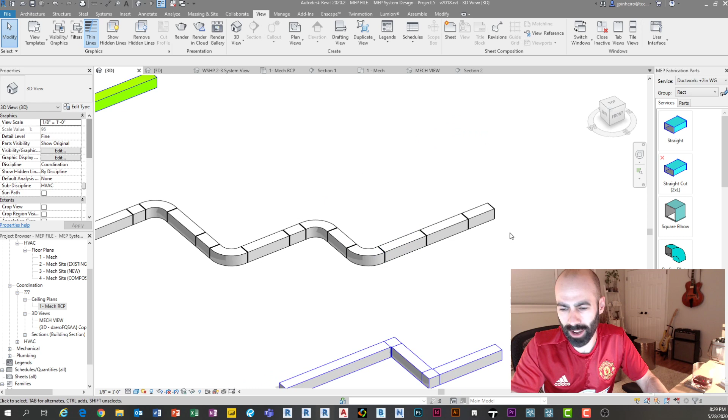Not only that, but let's say I'm doing a visualization and want realistic stuff here. I can go over and say I want to put some hangers on this. So there's strut hangers, trapeze hangers, all kinds of hangers, and these things automatically adapt to the size of your duct.

Right? Look at those. The ability to see how fast I can put this together. So think about, for visualization purposes, how awesome that is, to be able to quickly model this. You saw when you have things set up, you can model it really, really fast. And then in one click create flanges on the ducts and have a visualization. It's freaking awesome.

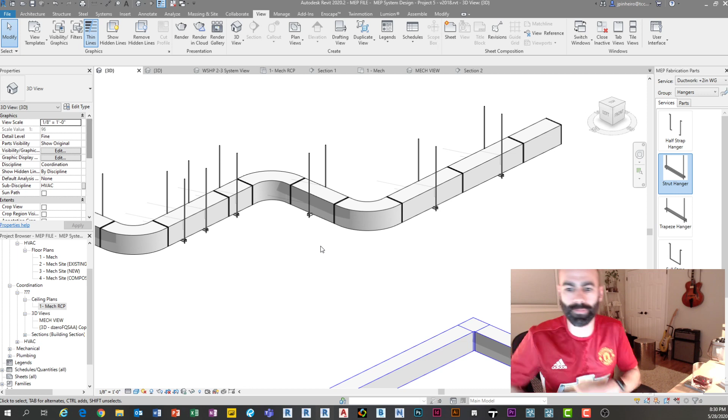So I really wanted to show that. That's Design to Fabrication. We're at 8:30, the hour mark, and my throat is going.

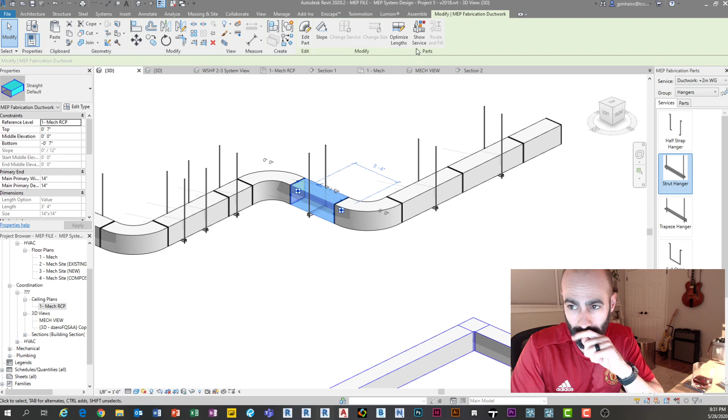Can each segment be individually scheduled if needed? Of course, 100%. These parts have all their own pieces and information and all kinds of good stuff, so you can do all kinds of great stuff with parts. I'm not going to even pretend like I know how to go from parts to fabrication, all that stuff. I've seen it happen, but someone else out there can probably answer that question for you.

Let's see, can each segment be individually scheduled? I already answered that. Sweet.